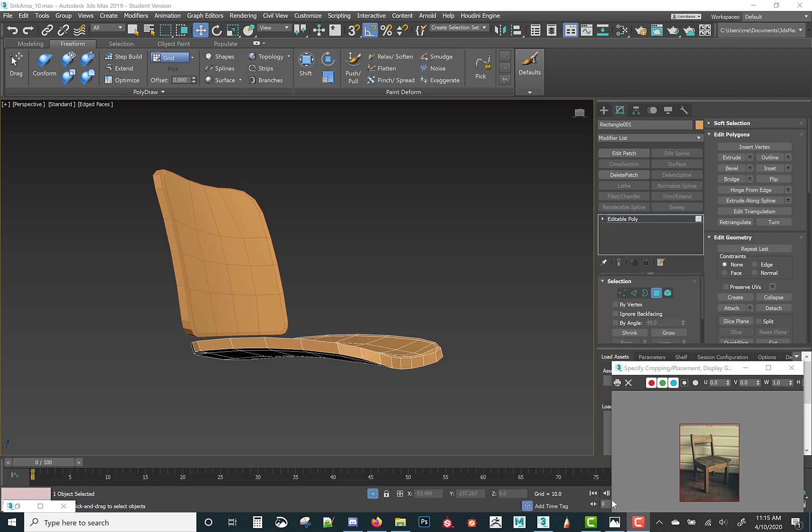So I got a chair. I built this in my class, just using blocks and some bins. But it's not the chair I want to have in my space. I'm going to have something more like this.

So I found this on the internet. It's a very small image, and Max will not let me zoom in, only zoom out, which is weird.

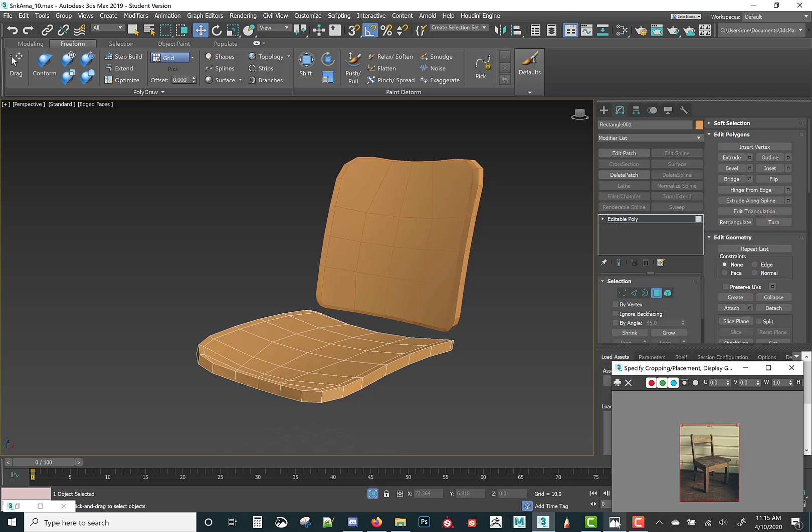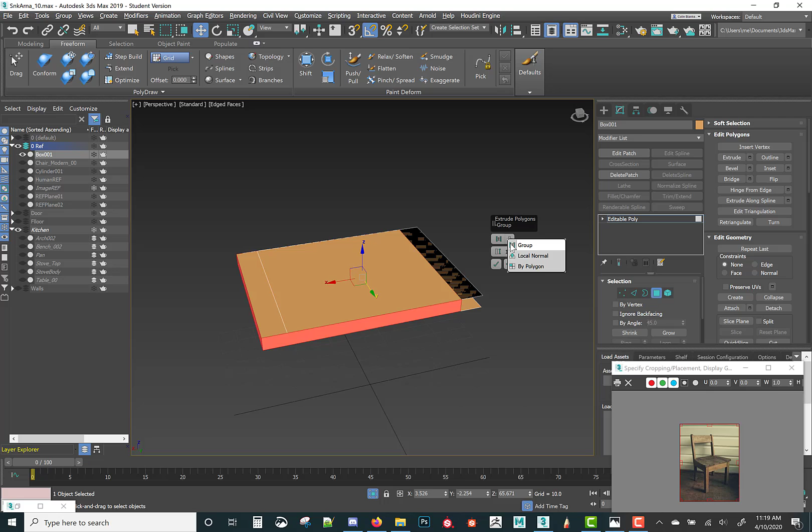One of the things is, if we go here and extrude, we can isolate now. We go here and we extrude. First off, let's extrude off the actual normals of the object. It all collapses and makes it a nice, clean, four-sided object.

That's great for modeling other things, but I'm actually modeling the legs into this. So what I want to do here is extrude two of the sides. Hit OK. And then I'll grab that, and I'll grab these two sides and extrude there.

Now I've got squares that'll allow me to extrude right there. Boom, boom. And so with the first extrude, actually, you know what?

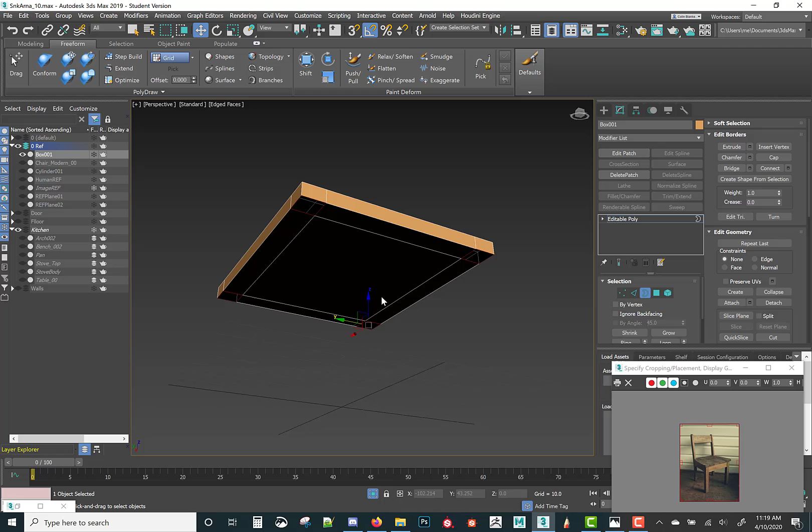I'm going to delete that and go to border mode, and select all these borders because this will just be a lot faster. I'm going to hold Shift, and then I'm going to have the first extension to represent the crossbars.

The crossbars here will actually have a tilt sloping backwards, just like this will have a slight slope going backwards, and I bet these will have a slight bend, so I'll have to keep that in mind when I'm getting into the actual final tuning.

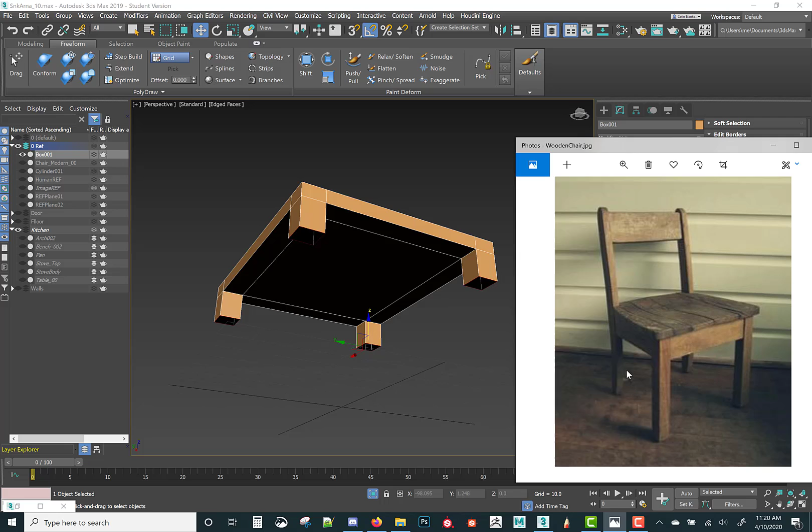But that is a crossbeam space right there. I'm going to hold Shift and just start a new one. I'm going to leave them empty, uncapped, and then I'm going to go ahead and get.

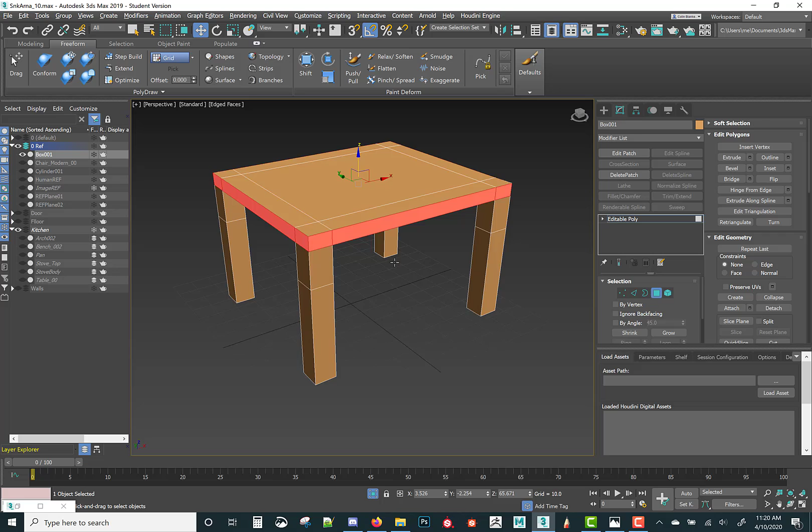There's a lot of extra polys in here for the most part, but there's also perfect edge loops, and that's what I'm keeping. So if I want to break those edge loops and have that little overhang, that's how I'm going to do it. It's just the extrude, like the first one I showed you.

All right, so I'm going to speed up the creation process at this point because it just kind of gets a little tedious. I'm going to find some music and play some tracks for you guys.

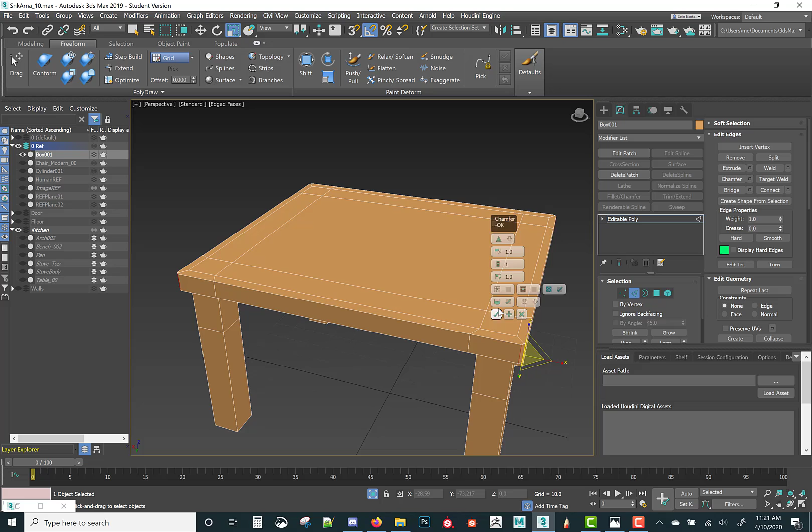In this particular position right here, what I'm doing is just thinking about how I'm going to chamfer up my edges for the high poly or the low poly so that it carries the look and feel of the actual chair into the game engine.

I like to try to avoid using scale when the structure of my object is good, so I'm going to use the vertices, edges, and faces to move and shape the overall proportions of the object. So just kind of follow along as best you can.

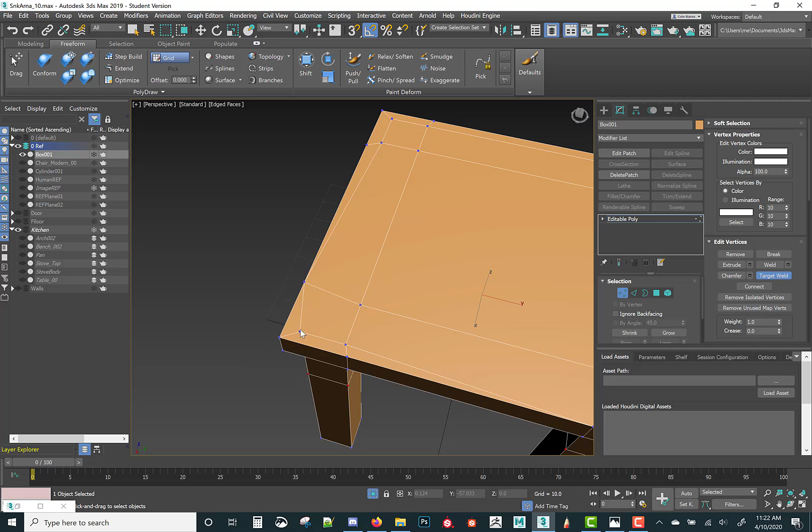It's mostly just target welds and extrusions. There's a couple times where I actually delete polygons to create a hole for a border, and we'll use the transforms plus the shift function on the keyboard to make things work and tighten things up. So enjoy.